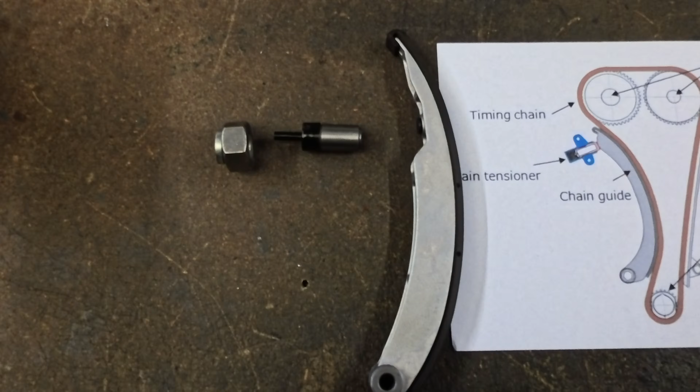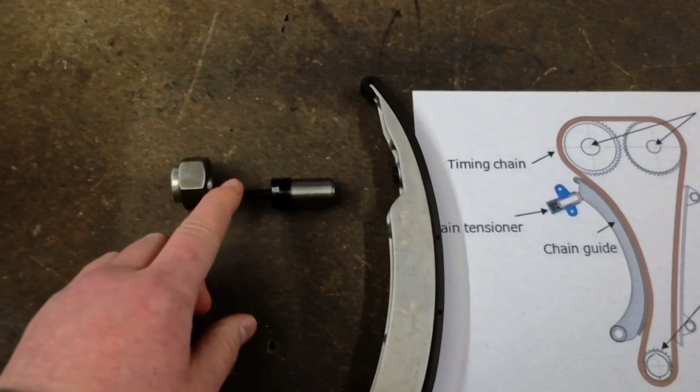I'm explaining the expansion cap that's installed as an upgrade or retrofitted item. Even Aprilia dealerships are fitting it if you're suffering with a rattly engine on startup, particularly on hot startups.

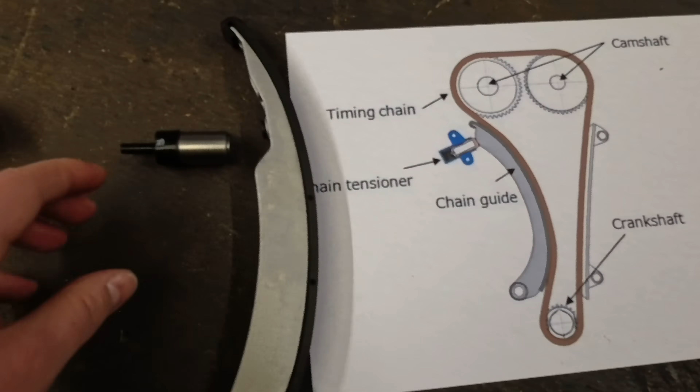On the Aprilia Tuareg you have a hydraulic cam chain tensioner, and the new item—I haven't got it yet, but it's basically a chamber that bolts on the end of it which stores oil. When you turn off the engine, the oil pressure fed to the hydraulic cam chain tensioner will drop after time.

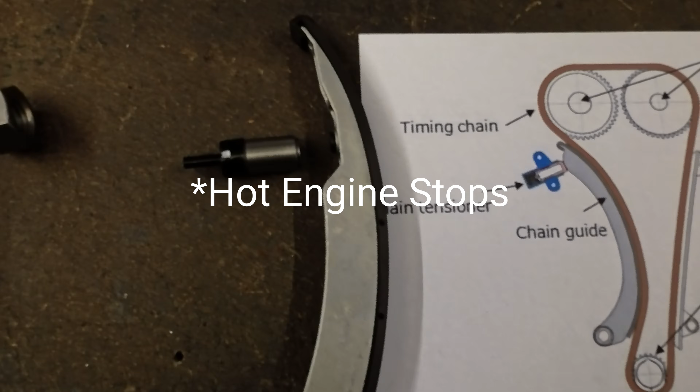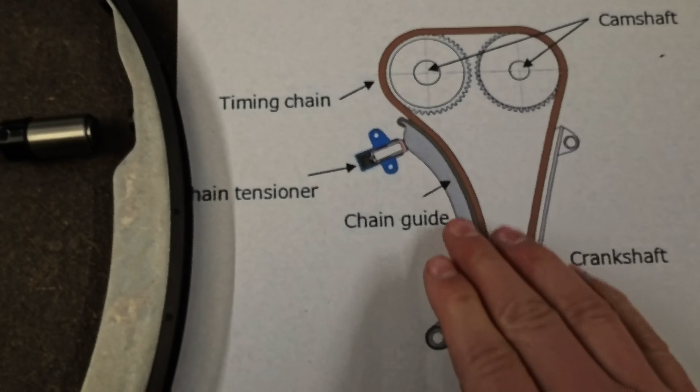It drops quite quickly on hot engine stops, so every time you're stopping and starting the bike, particularly when you're off-roading and pulling in or dropping the bike, every time you start up the engine it's rattling, because this rail loses tension from the tensioner, and then the chain slackens. When the chain is slackened over time it can cause damage to the rail itself, break off the plastic here.

You can also lose a little bit of timing, so it's more likely that the valve timing is going to be slightly out on startup and more likely to have overlap or piston slapping the valves basically.

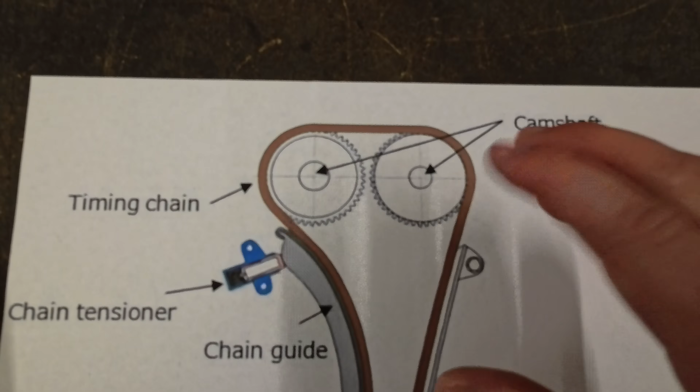When the engine is running on an Aprilia Tuareg, the oil pump which feeds the tensioner is pumping oil to it, and that's what's giving it tension. When you turn off the engine, the oil pump stops feeding the tensioner, and then the rail will move back, slackening the chain.

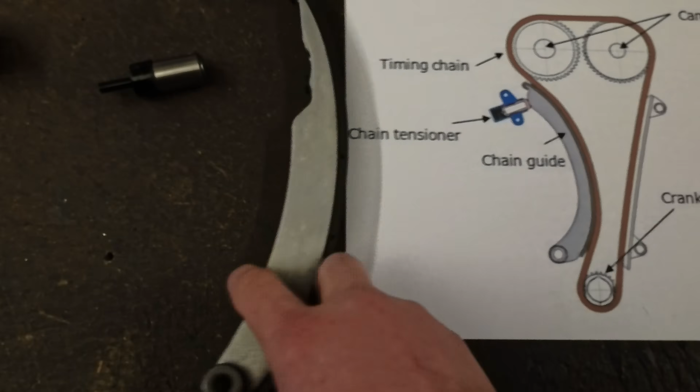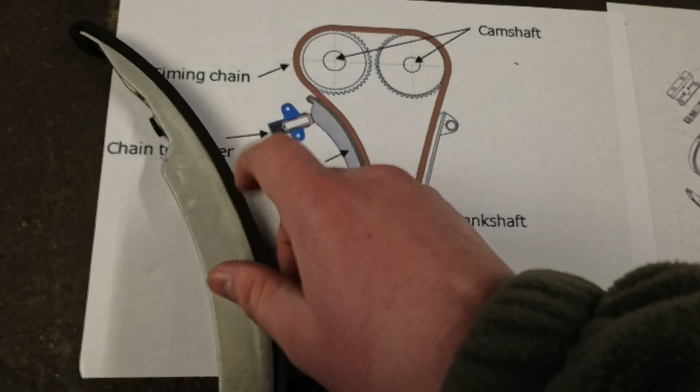On cold startups this item's not going to help so much, but because it's an off-roading bike you're going to want to start and stop it often, or if you drop the bike you're going to need to start it up again and again, and the more times you do that the more chances of rail damage, or eventually the chain can jump a tooth on the sprockets, and then your valve timing will be out, and the piston can smash your valves.

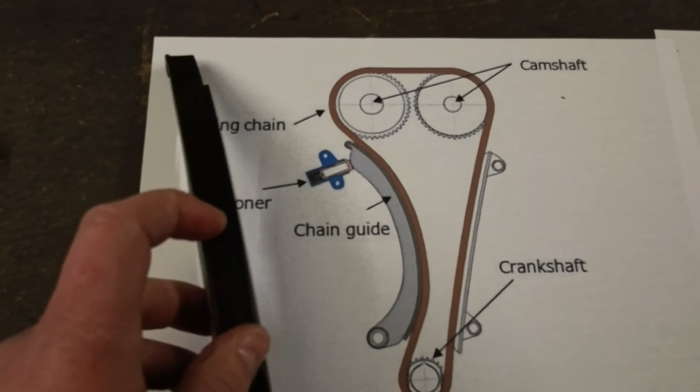Obviously this is an extreme example, but in short it's just going to make it not so noisy on startup and reduce wear on the chain guides and the rails.

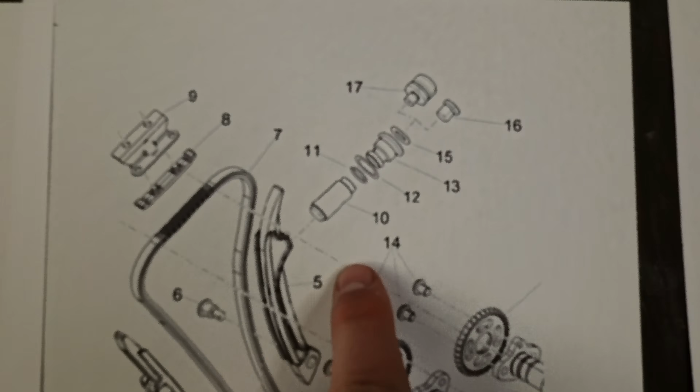When the item does come, it's basically, in short, a little chamber that bolts on the back of the hydraulic tensioner. You can see on this diagram, this is the Aprilia setup. That's the tensioning rail there. That's the hydraulic tensioner. That is the tensioner retainer, which I'll show you in a second.

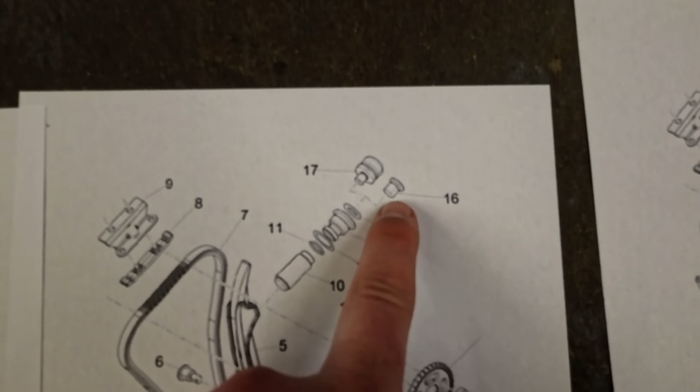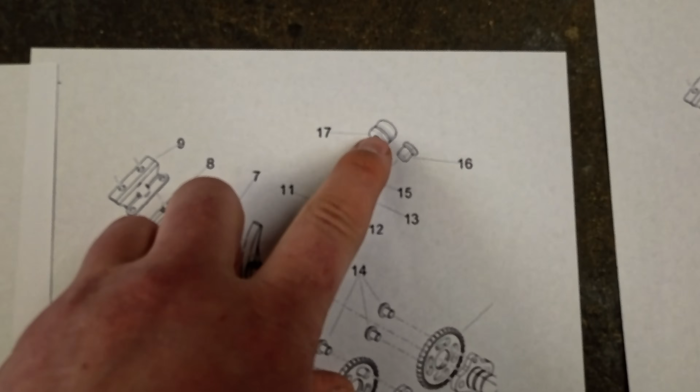Part 16 is this stock item, it's just a cap. Part 17 there is the expansion chamber, where it's just a cavity of oil. When you turn off the engine, that's still got more oil in there, so it takes a lot more time for the tensioner to lose its pressure against the rail because there's more oil in there. That's basically it in short.

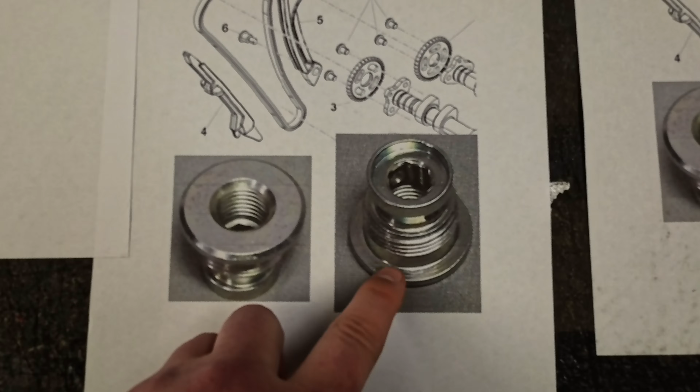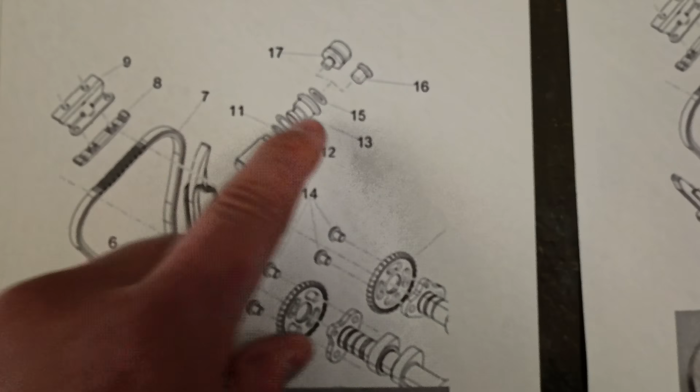Part number 13 on the diagram here is what Aprilia says just make sure it doesn't come loose. It doesn't have any spanner flats on the outside, so when you undo part 16, the cap, it might loosen the tensioner retainer, which is number 13. As you can see in the diagram, there's an Allen key fitting inside, and that's what you just got to do to torque it up and make sure it's tight before installing the expansion cap there.

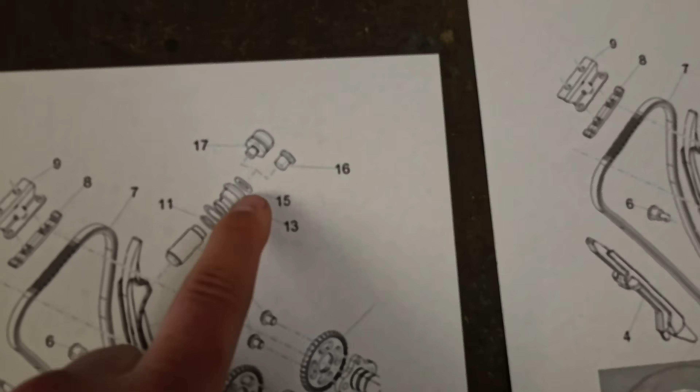And when you buy that, you will want part number 15, the compression washer. It's just a sealing washer.

Yeah, it's quite an expensive item, so I'm going to see if it is worth installing. But anything that's belts and braces against potential engine wear or excessive wear is worth it for me.

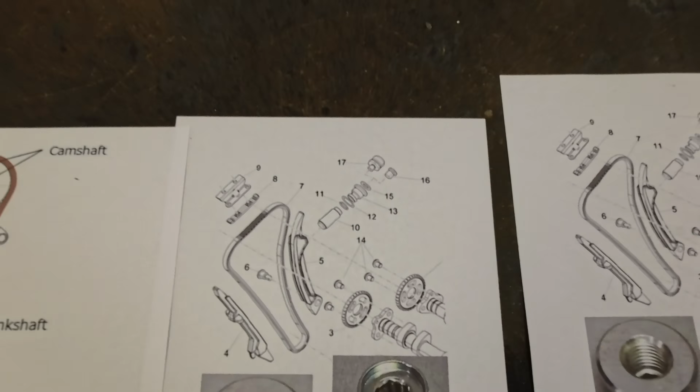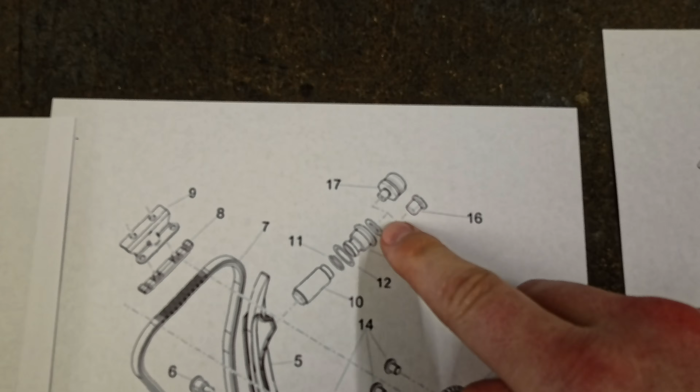Part 16 is the original part, which you remove and throw away, and then part 17, the expansion cap, is the one we're fitting, the uprated item. I'll get back to you when I've installed it and let you know my findings.